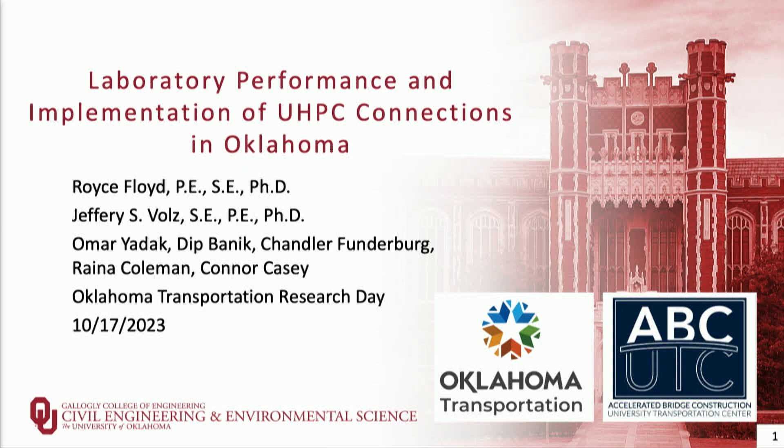Before I start, I always want to acknowledge the students that did a lot of the work on this project. My co-PI, Dr. Jeff Volz, is instrumental in a lot of this research, but also Omar Yadak, who is here today, Dip Banik, Chandler Funderburg, Raina Coleman, Connor Casey, and a bunch of other students have worked throughout this effort.

So ultra-high performance concrete has been mentioned a couple of times already today. It's a relatively new technology when we talk about concrete within the last 30 years. It has a very high compressive strength, typically greater than 18,000 PSI. And what really sets it apart is that it has a post-cracking flexural strength, so we're able to get tension strength after we have initial cracking on the order of 700 PSI or more. It has very low to negligible permeability, it's resistant to freeze-thaw, it creates a great bond to base concrete, and also has a very short required embedment length for reinforcement that we've already heard about today, to where we can use this as a connection material, repair material, a way to increase the life of our structures.

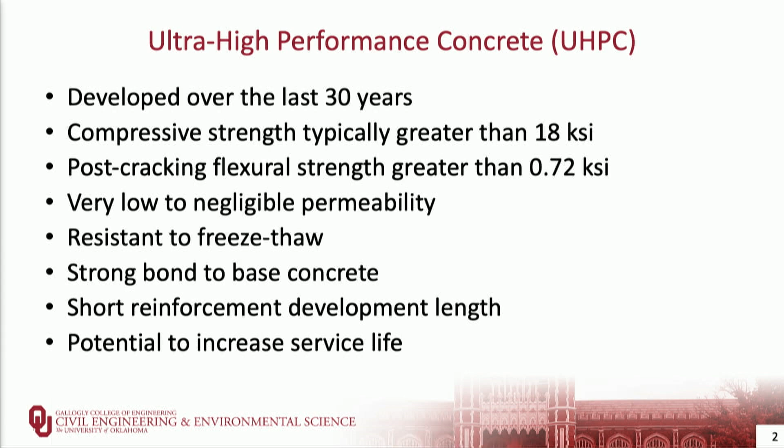To get ultra-high performance concrete, we have a low water cementitious materials ratio. We optimize the particles within the mix. We don't include coarse aggregate to create a more homogeneous material, and then we typically include 2% by volume of steel fibers, but sometimes it can be more or less. Because we don't have that coarse aggregate, it does take more mixing energy. This is an illustration of mixing ultra-high performance concrete where you start with a very dry powder material. You add the water, and it still looks relatively dry. You start to get cement balls forming, and by the end of it, you get what I refer to more like pancake batter - Walt referred to it as molasses - but it's a very flowable material.

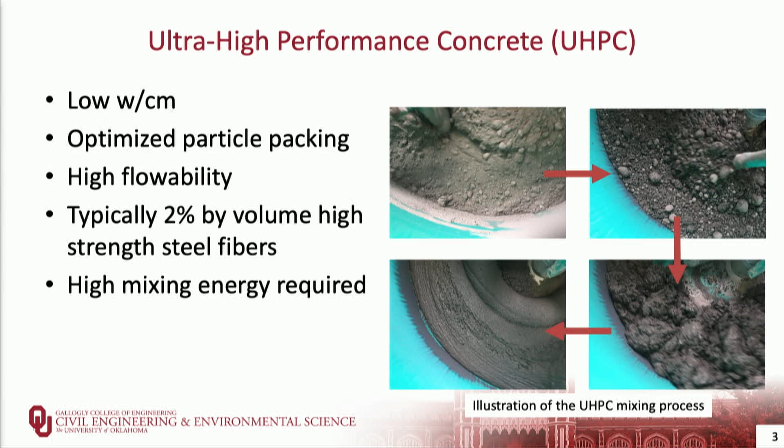In terms of UHPC research in Oklahoma, we've been involved in around 8 projects over the last 6 years that have been sponsored either by ODOT or the Accelerated Bridge Construction University Transportation Center, which included mix design development, connections of panels, UHPC link slabs, continuity connections between precast girders, repair and rehabilitation efforts, and then some implementation projects which have moved on to full projects using UHPC. There are several that are currently underway - Walt mentioned some of them this morning.

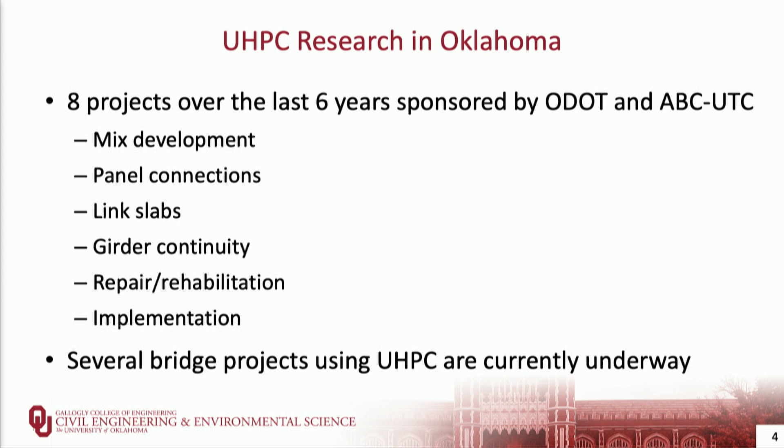Today I'm mostly going to talk about precast deck panel connections and girder continuity if we have time. But to start, in our first project we looked at developing what you may see as non-proprietary UHPC, or open source mix design, basically a mix design using locally available materials.

Using materials available throughout Oklahoma, type 1 cement, silica fume, slag cement, and a very fine masonry sand, we were able to develop a UHPC mix design that could obtain a compressive strength in excess of 18,000 psi, a tension strength greater than 1,000 psi, and a cost of around $800 per cubic yard, compared to $3,000 or more for some commercially available products. It has excellent bond strength, very low to negligible permeability, and high freeze-thaw resistance. I'll show you some of those results in this presentation.

So we looked at some different fibers as well. This plot gives an example of direct tension strength—instead of flexural strength, you often measure direct tension strength with UHPC. The black line bars use the typical straight fibers included in most UHPC, and the dashed line bars are a hooked-end fiber. We see that we typically get similar performance, but tension strength is usually a little higher when we use the typical straight fibers.

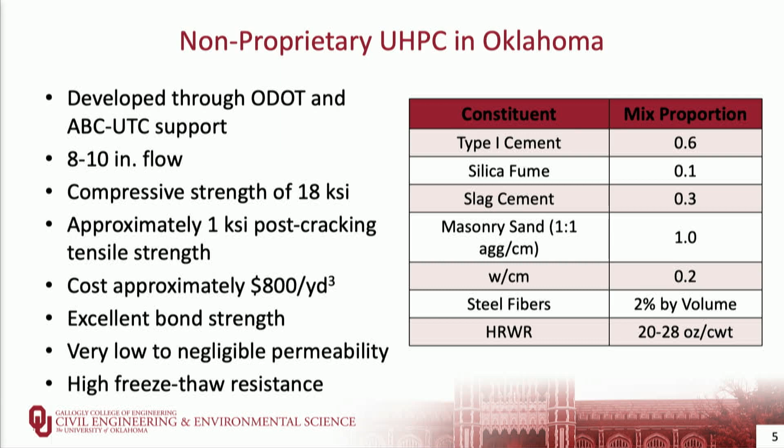If we look at flexural strength, which appears to have disappeared from my presentation—but looking at flexural strength and ductility, we are able to add some ductility to the mix by using those hooked-end fibers.

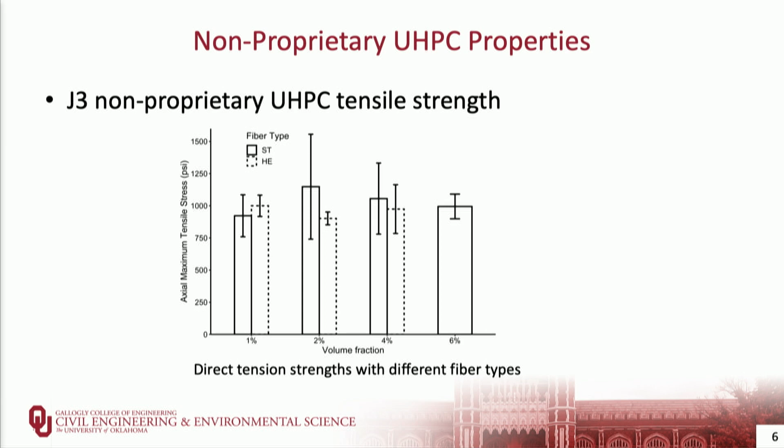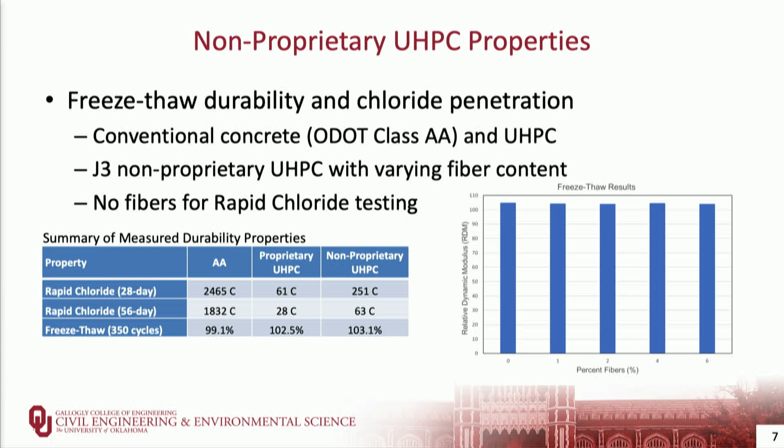We did extensive durability testing for freeze-thaw, chloride penetration, corrosion, and some other tests using our UHPC as well as some conventional proprietary UHPC products, and found excellent durability for both materials. Freeze-thaw resistance typically showed no degradation even after 350 cycles—we always had about 100% relative dynamic modulus. Using rapid chloride ion permeability, we had less than 100 coulombs passed for both materials.

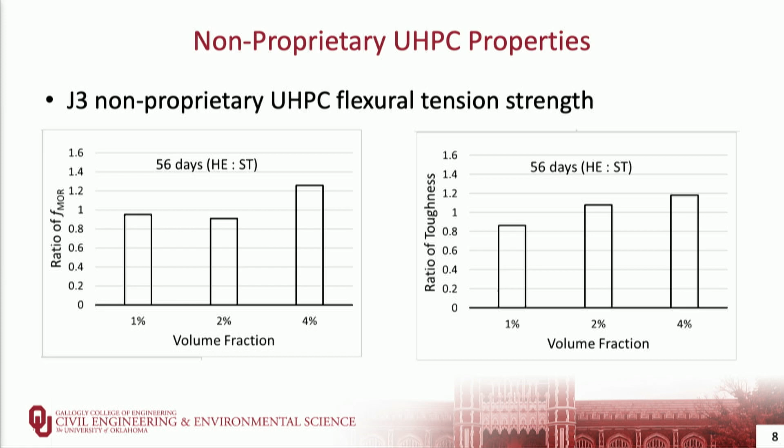So here my slides got out of order, but looking at flexural tension strength, we have a ratio between the hooked-end fibers and the straight fiber specimens. We see that for the most part we get a little less tension strength, so a little less flexural strength with a hooked-end fiber, but we are able to absorb more energy, as seen in the toughness on the right side.

All right, so to get to the more exciting things in my opinion, looking at some applications of this material, one of the first we considered was connections of precast deck slabs.

The picture on the left may look familiar to some of you—those are precast deck panels going into a bridge here in Oklahoma. On the right side, you can see those non-contact lap splices of epoxy-coated rebars that Dr. Darwin talked about earlier today.

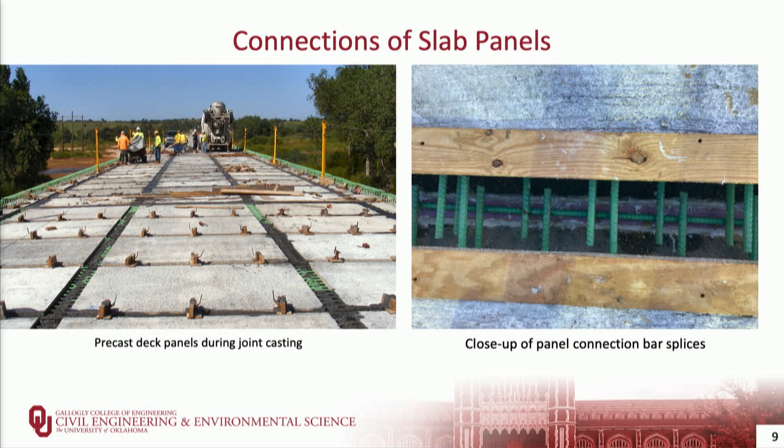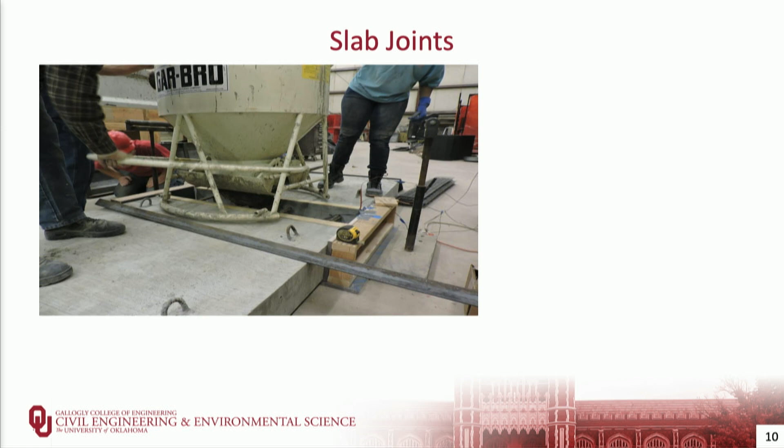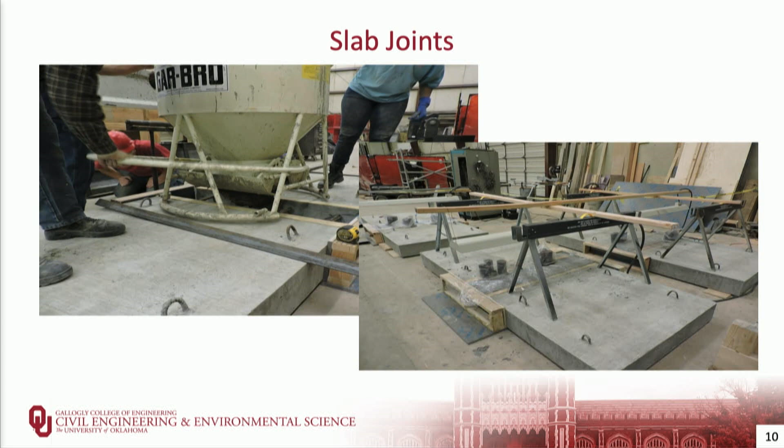To start, we cast some specimens in our lab at the University of Oklahoma that were similar to these. These were actually intended for repair and retrofit, so not exactly the same application, but we tested both the proprietary and non-proprietary UHPC materials. We used contact lap splices for these specimens, heat cured our UHPC to increase the speed of curing, and then tested these in both static and cyclic loading.

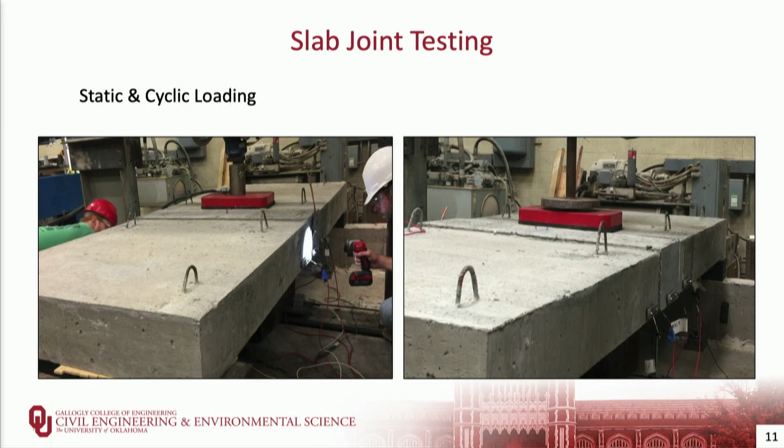The videos here didn't want to play—there's not much to see with them, but basically we would load over and over again for about 3 million cycles to look at the long-term behavior, or just look at the static load behavior.

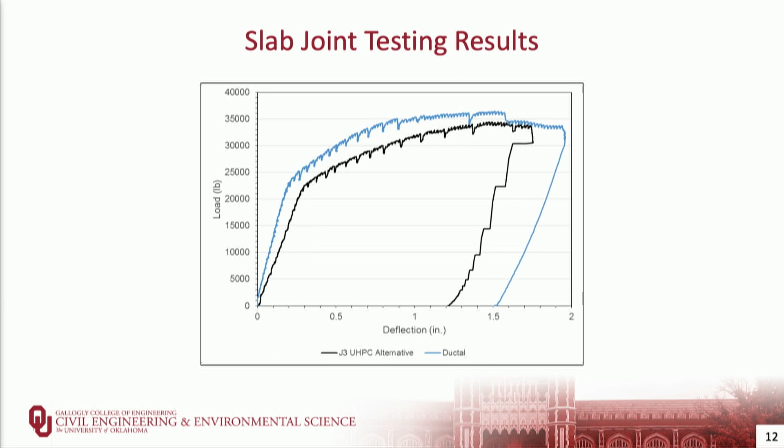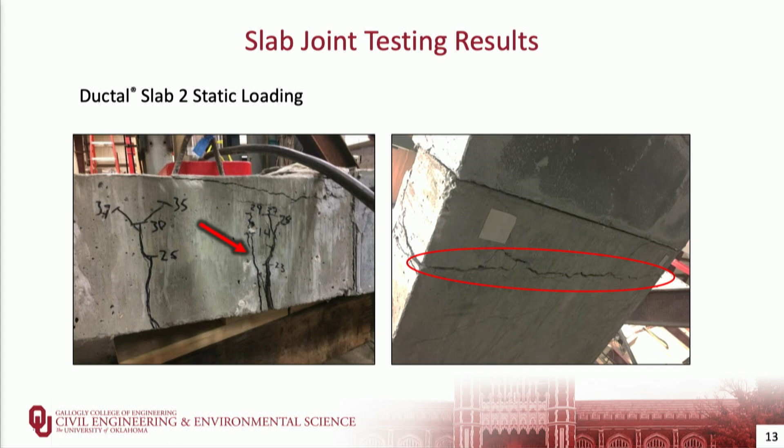This is a graph of load versus deflection for a static load test using the proprietary UHPC and the non-proprietary UHPC. You'll see they have very similar behavior. There's slightly higher stiffness for the proprietary material, related to it having a little better bond to the base concrete. But in both cases we ended up with a connection that actually produced a strength higher than the flexural capacity of the slab by itself. Looking at cracking in those slabs, we see that the majority of cracking occurred out in the base concrete, which is what we would want in terms of making a connection with this material.

So after completing some of that experimental work, I was asked to be part of one of the first implementation projects in Oklahoma using precast deck panels, which was the bridge over the Lake Eufaula spillway on the dam down there at Lake Eufaula, where they used precast deck panels connected with UHPC.

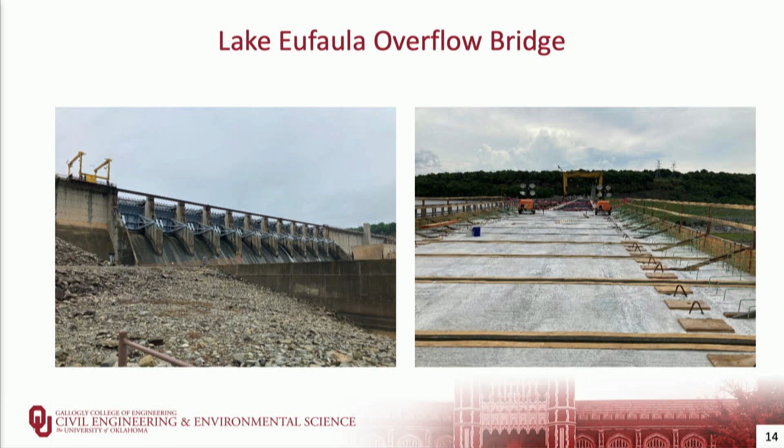These were full depth deck panels, full width, going all the way across the bridge because of the requirements for the equipment. It was a 2-girder bridge system, so they had to take the panels across the entire width. They had an overhang on each side of the girders, transverse joints, and shear pocket connections to make the connection within the haunch.

Here you can see some close-ups of those connections in the mock-up. They did a mock-up section close to the site so the contractor could experiment with their methods, to prove that they were able to make these specimens effectively, to place them on the bridge, and to make the connections with UHPC.

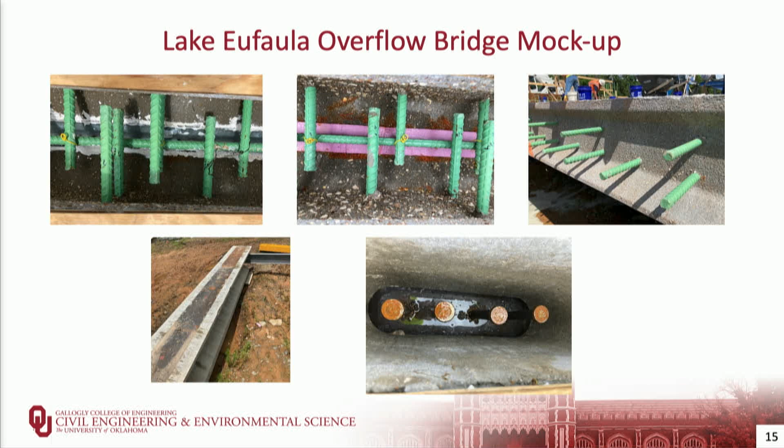They tested some different variables in the mock-up, which gave them an opportunity to see what would be the best construction method. Up top, left and middle, they have a couple different sealants used for the bottom of the joint. On the right, you can see the exposed aggregate surface used for all the deck panels. These girders were pre-stressed concrete girders with a steel plate embedded in the top to which the shear studs were welded.

For the mock-up, they used 2 horizontal axis high shear mixers and a proprietary UHPC material. They placed the UHPC into the joints using wheelbarrows and some pieces of plywood as a backer to catch the material as it was cast into the joints.

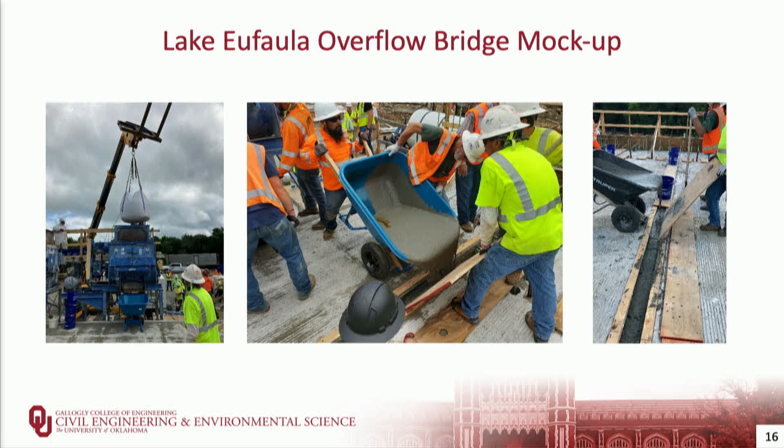On the right side picture, there are some 5-gallon buckets being used to provide a head on top of the UHPC as it's curing.

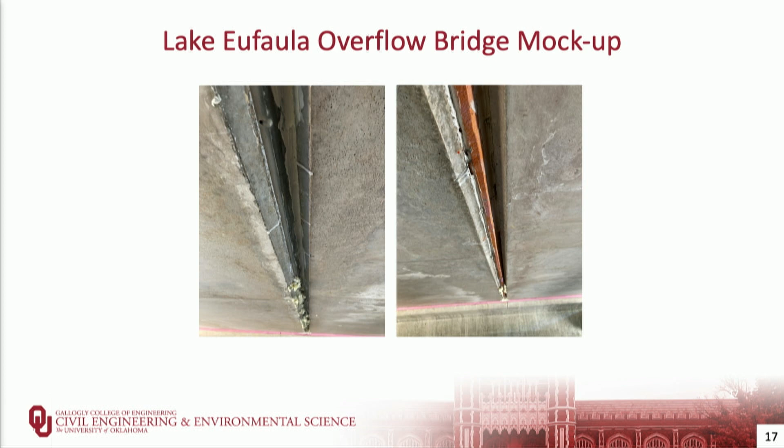Here you can see the bottom of those joints on the bridge mock-up after casting. You'll notice some spray foam insulation along that joint, where they had some leaks in the initial casting. UHPC is very flowable, it will find any opening in the formwork, so the formwork needs to be watertight to keep that material in. Fortunately those things happened on the mock-up, not the actual bridge. They were able to correct those issues with better sealants, and the same problems were not seen in the bridge casting.

As part of our work out there, we took some cores from the mock-up to look at how well the material had consolidated and flowed through the joints. We took a core of the UHPC itself from one of the joints, and then some from the interface between the UHPC and the deck panels.

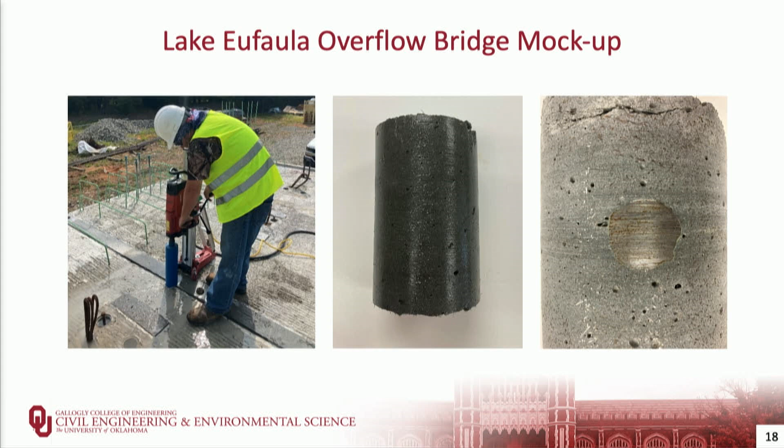In the middle you can see the core of the UHPC itself. There are a lot of shiny spots throughout the depth of that core that are the steel fibers distributed well throughout. On the right, you can see the UHPC encapsulating one of the rebars, showing very good consolidation all the way around. Some of this material flowed 20 or 30 feet from the point it was placed.

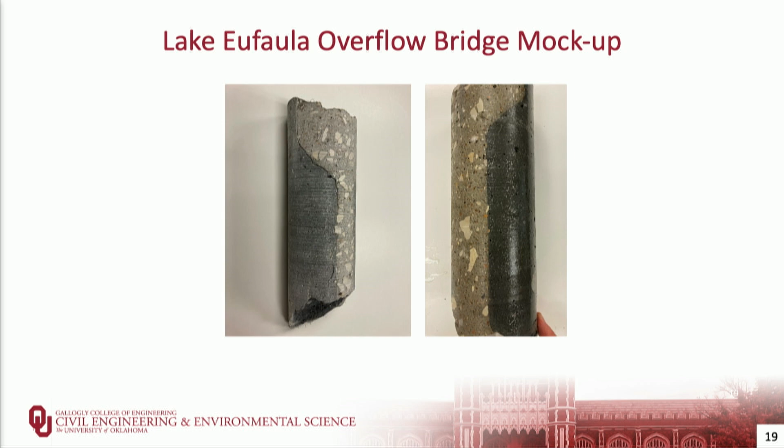We also took some cores from the interface between the panel and the UHPC joint. We were able to get some that were very close to the middle that we could cut down. The one on the right, we cut down and ran a splitting tensile strength test on that core, which had half UHPC and half conventional concrete, to examine the bond between the two.

This specimen failed at about 800 PSI. It was hard to tell exactly because in the middle picture, that half UHPC core is still holding the same load as at the point it cracked. To put that in context, the expected splitting tensile strength for the concrete in the panels was only 500 to 600 PSI, so the UHPC provided a bond equal to or better than the strength of the concrete itself.

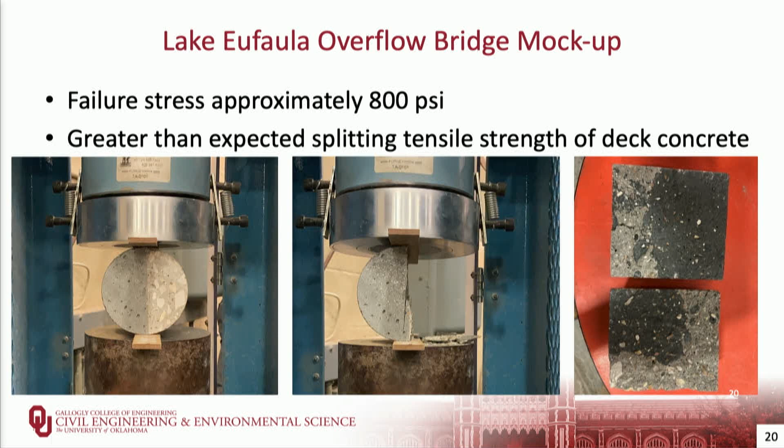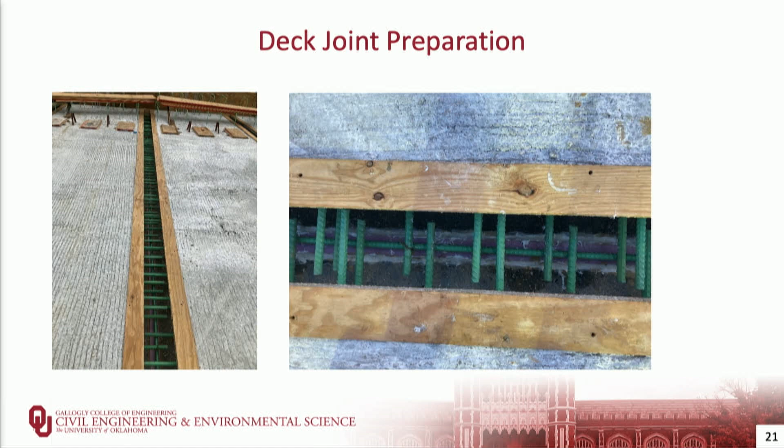Once they got onto the actual bridge, they placed these span by span. By the end of the project, they were doing 2 spans at a time. The joints were prepared with wood strips along the side to cast the joints high so they could come back and grind after the fact. On the back of that picture, you can see the shear pockets covered up with pieces of plywood. The joints were placed mostly at night because it was very hot when they started in August.

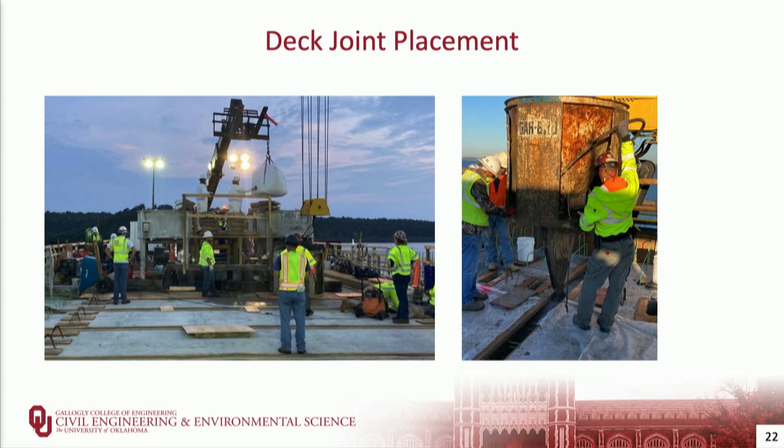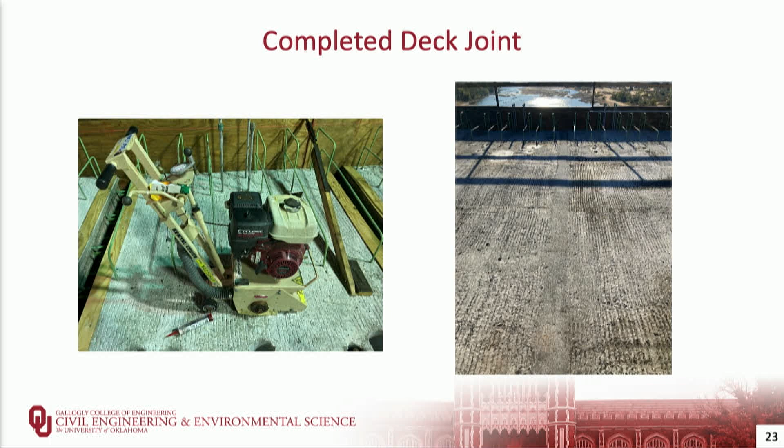So they would cast overnight. On the bridge, they had a gantry crane on tracks running all the way down, so they were able to place the material with a concrete transfer bucket, and they fabricated a chute out of some rubber sheeting on the bottom to assist in placement. Once the joints were completed and allowed to cure, they went back and ground them flush with the surface of the bridge deck. If you look at that picture on the right, you can barely even tell that there's a joint between those two panels.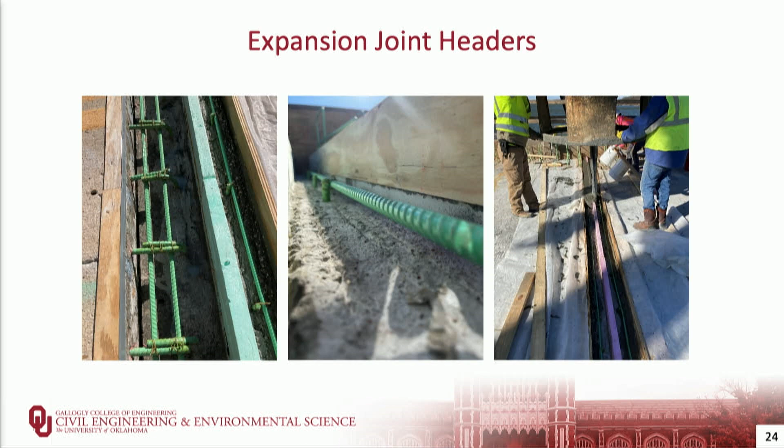That bridge also uses expansion joint headers that were cast with UHPC. These were cast after the deck panels were put into place, but before a high-density overlay was placed, both at the ends of the bridge and at the internal expansion joints.

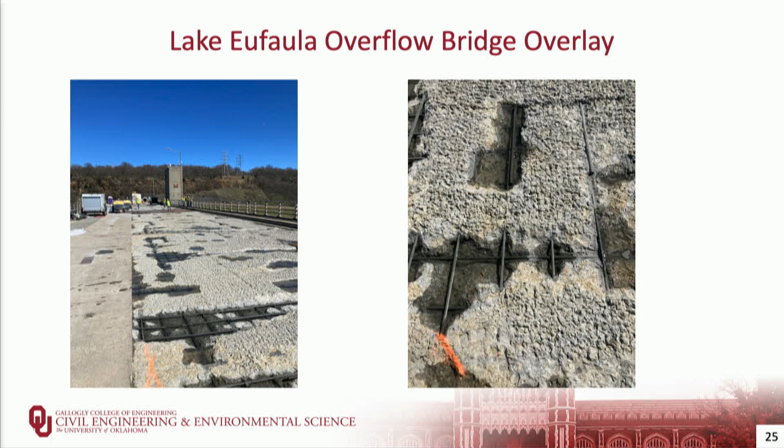One interesting thing that doesn't really have to do with connections, but is pretty exciting about UHPC from this bridge, was when they were repairing the approaches, they actually hit some of the structural rebar over the equipment galleries and had to go back with a structural overlay, and decided to go with UHPC on this project. So they milled down the concrete surface, did hydrodemolition to create a nice surface preparation, and then cast an ultra-high performance concrete overlay.

Here on the left, you can see placement of the overlay. They used a material that was actually mixable in a ready-mix truck, so they were able to do 5 cubic yard batches in a ready-mix truck. They'd bring that out onto the bridge, place the low spots first, and then come back with the complete overlay that you see there on the right.

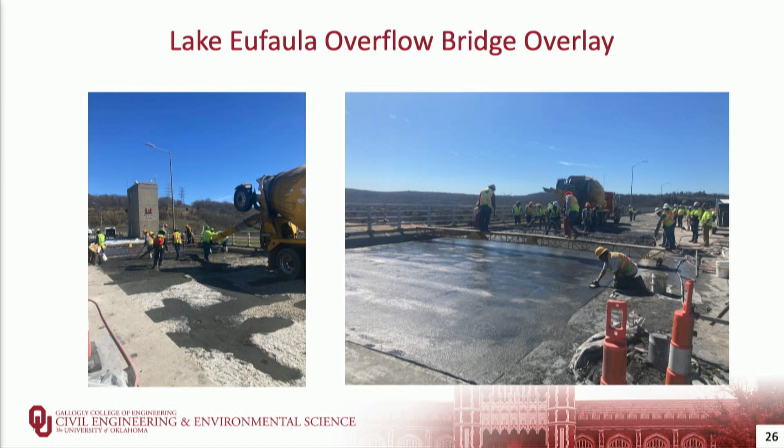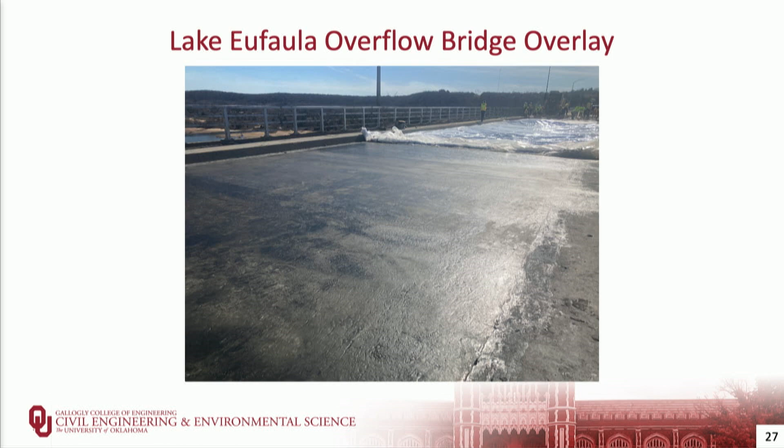This is a picture of the finished overlay immediately after placement. This is actually one of the worst looking sections of the overlay because it was the first they placed, and it still has a very uniform surface and ended up very smooth. They came back in, grooved the surface, and then we came back out and did bond pull-off tests on the overlay, partly for their quality assurance plan, but also to look at bond in different locations of the overlay.

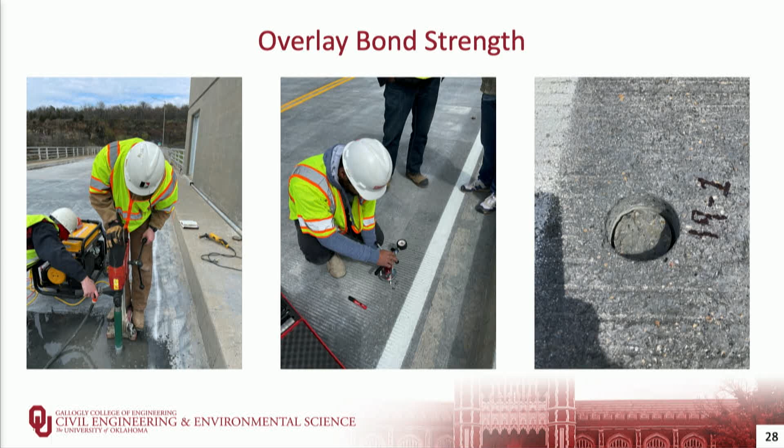So we cored sections through the overlay that we had marked previously so that we would get the thin 1.5 inch thick sections, not the half depth, 6 inch thick sections. We then glued steel pucks onto those cores and used a pull-off tester to measure the bond strength. There on the right, you can see the end product of one of those tests, and if you look really closely, you can see the interface between the overlay and the base concrete.

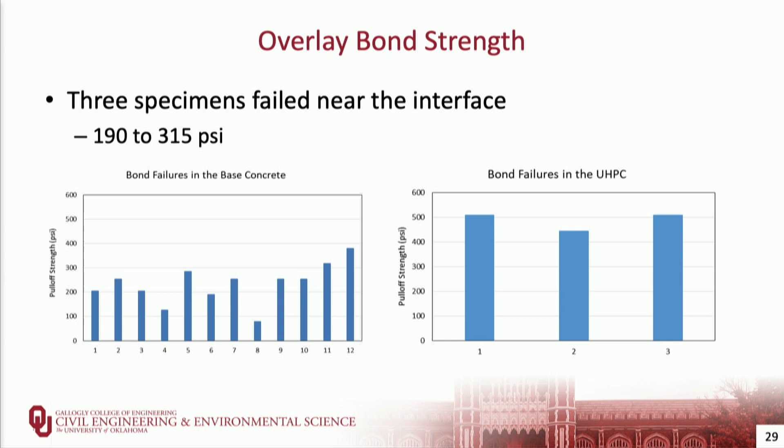In terms of the overlay bond strength, we had just 3 specimens that failed at the interface. 12 out of the 18 specimens actually failed in the base concrete and not the joint between them. Then we had 3 specimens where we missed the overlay thickness and cored into a deeper section, so in those cases we were measuring the tension strength of the concrete. But in the cases where we were actually measuring the bond of the interface, results were between 190 and about 315 PSI. The target was just over 200 PSI, and so they were willing to accept these results as meeting their specification.

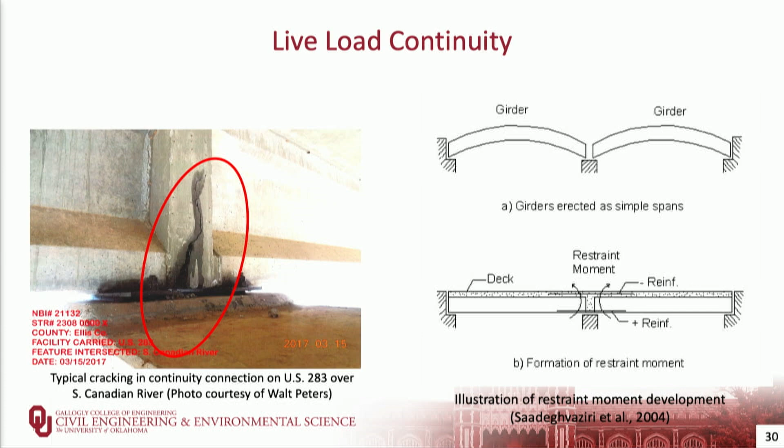We're getting close to time on this presentation, but I want to talk just a minute about another project we did in the lab where we looked at using ultra-high performance concrete to create live load continuity between precast girders. This is a picture of an in-service bridge over the South Canadian River where they had used conventional concrete to make that connection. The restraining moments caused by creep, shrinkage, and temperature in the girders had cracked that section, and this is a common thing seen throughout the state.

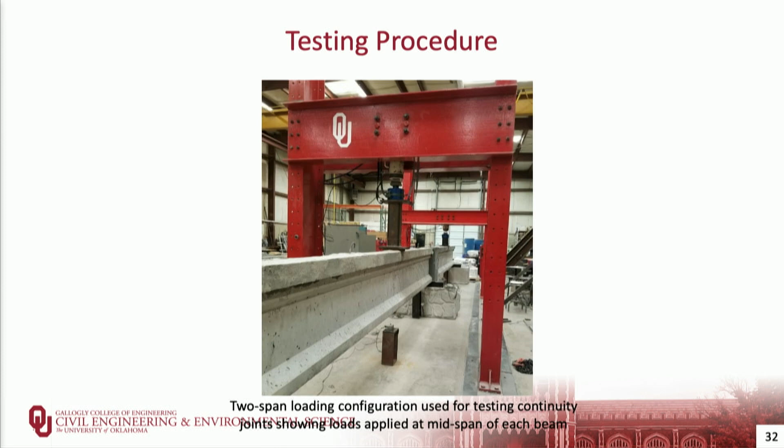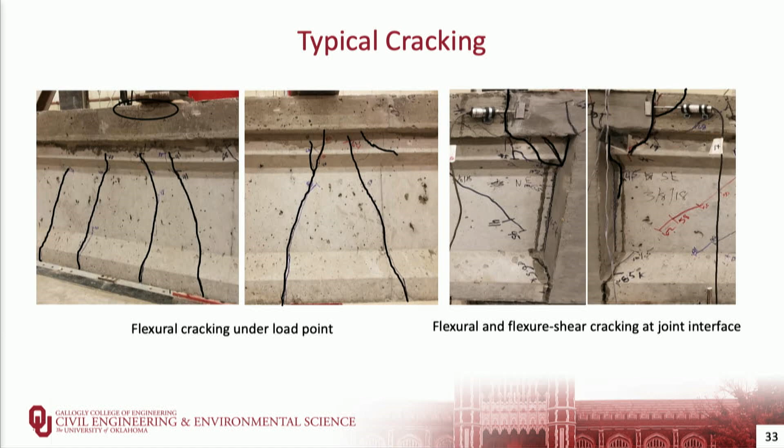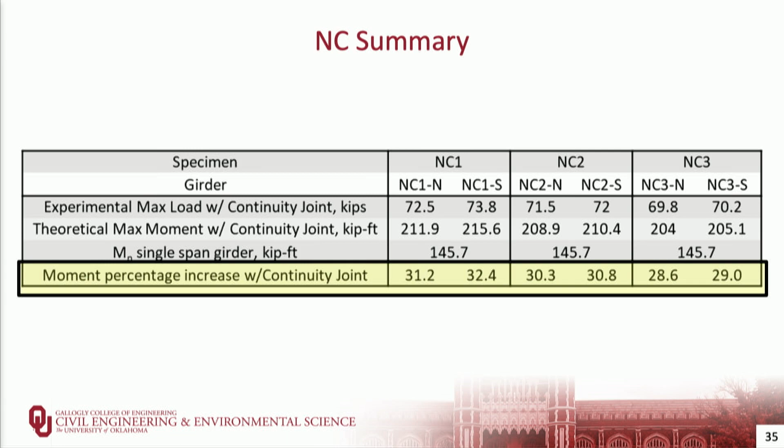So in the first part of our work, we actually looked at building some UHPC connections in the lab, testing them on a 2-span beam system, and looking at the flexural behavior at failure. If we look at cracking in these sections, we see flexural behavior in the girders, crushing of the concrete in the girders, and flexural cracking around the joints, but the strength was controlled primarily by the girders. To summarize those results, we saw about a 30% increase in load carrying capacity by making those girders continuous.